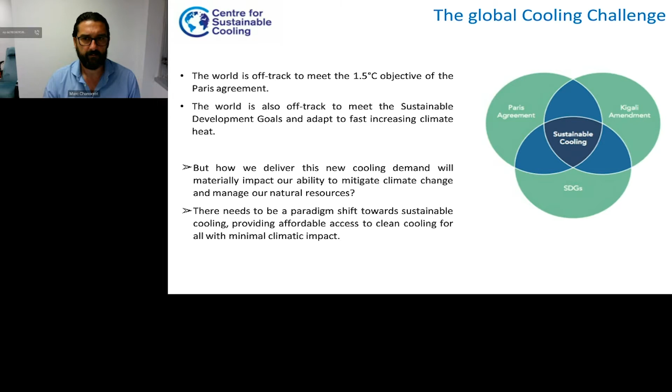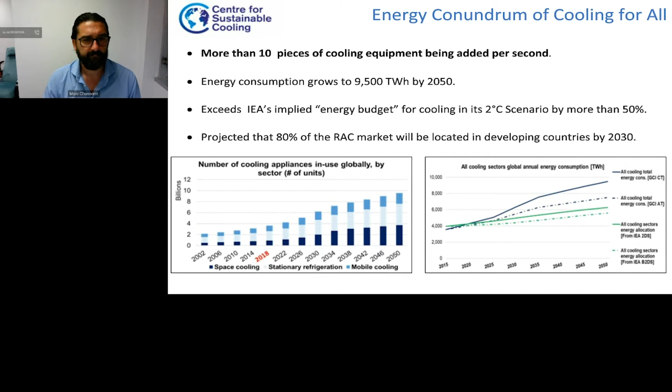The big problem is that if we want to deliver cooling for all and actually address the 1 billion people who don't have access to cooling, we could be looking at 14 billion appliances consuming 19,000 terawatt hours of energy by 2050. So that's potentially going to be consuming more than 100% of the projected renewables capacity. That's the challenge we're facing. How do we deliver cooling for all?

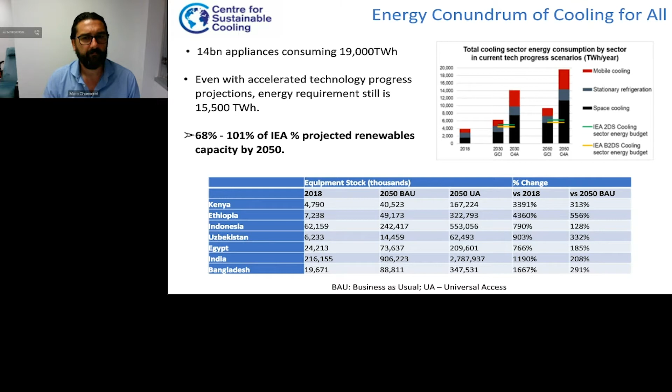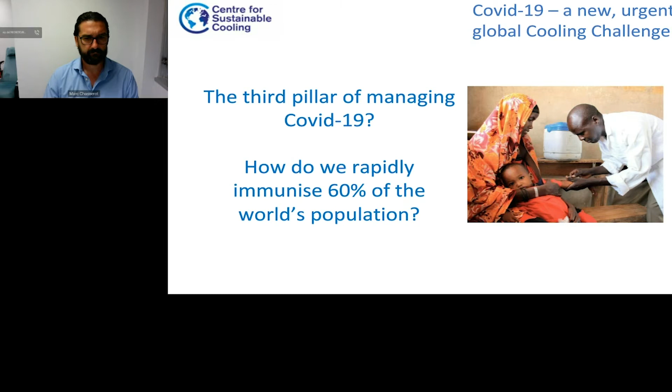There's also another new problem. While scientists are moving at unprecedented speed to develop and manufacture a vaccine, we've actually got to deliver it to potentially 5 billion people. And that's going to require a cold chain of a size and magnitude we haven't yet envisaged. Let's not forget that at the moment, we lose more than 25% of vaccines, sometimes 50%, due to lack of cold chains. And we've got 18 months to deliver this. And if we don't get it right, if we don't do it sustainably, we are going to embed dirty technologies in the system, which will remain there for some 10 years to come.

The challenge is that everybody is talking about green electricity and energy efficiency. But I think there's one really telling number which is so important. In 2017, the world added 94 gigawatts of solar generation capacity. That was the largest amount of deployment in any year. In that year, the energy demand of the new space cooling capacity, just the room air conditioners, was 100 gigawatts. So air conditioning alone is outpacing our deployment of solar. For this reason, what's really clear to me is that we can't simply look at greening electricity and energy efficiency to solve this challenge. We've got to look at step change, radical innovation.

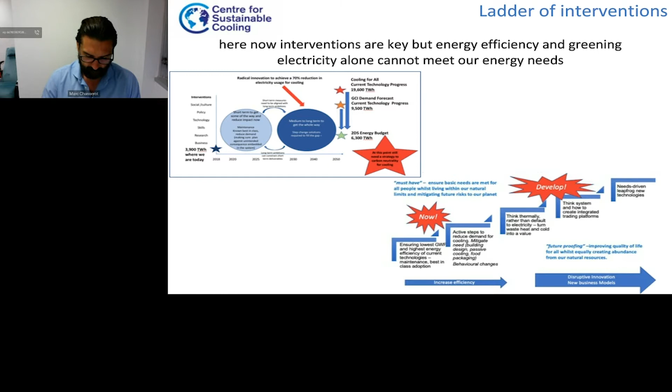The challenge is that when people think about energy, they mean electricity, and when they talk about energy storage, they mean batteries. And this blurring of concepts matters because it fails to recognize some basic energy facts of life. A large slice of our consumption comes in the form of thermal energy, and one of the fastest growing sectors of energy demand over the next 20 years is cooling. And the question is, can cooling be better served by energy carriers other than electricity and batteries?

In very simple terms, if we want to store solar energy to use at peak demand, is it better to put it in lithium ion or actually in a block of ice? And likewise, if we want to transition to electric vehicles, we have to remember that on a bus in a hot country, you can see 45% of the energy consumption of that bus is for the cooling load. Those are the challenges we face.

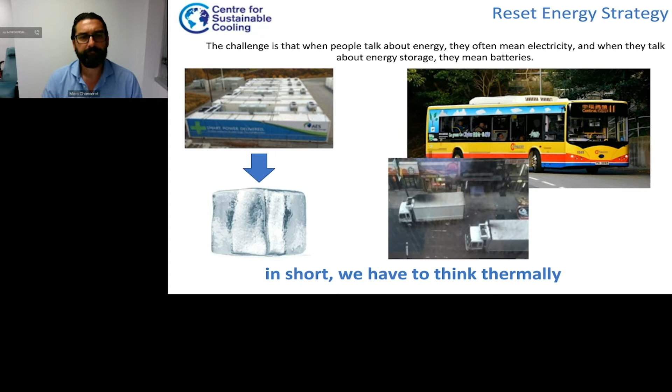So from my perspective, what we need to do is we actually have to change the question. We have to think about what is the service we require and backcast how can we provide it in the least damaging way, rather than this old-fashioned question of how much electricity do I need to generate. And in so doing, we can then start taking a systems approach to cooling.

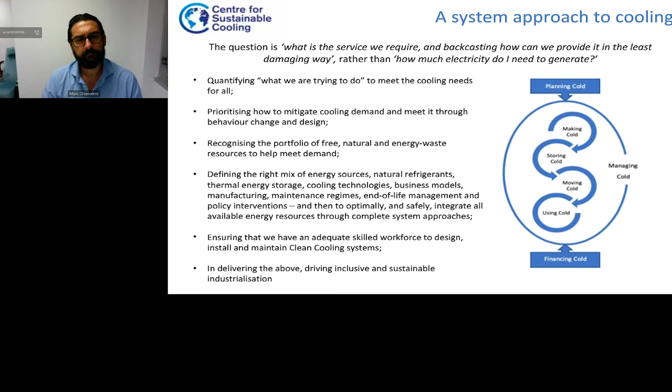We can start thinking about what's the cooling requirement. How do we make cold? How do we move cold? How do we store cold? How do we finance cold? And how do we manage cold? And once we start doing that, we really can start looking at the system and thinking about all the ways that we can meet our cooling demand in a sustainable way.

As a first step, for a government to ensure that the cooling needs of their populations are met equitably and sustainably, especially for the most vulnerable, they need to actually understand what these needs are. How much cold chain will be required to enable farmers' incomes to double by 2022? How do we end hunger and malnutrition? How much cold chain is needed to provide access to vaccines? How many degrees of cool comfort is required to avoid heat stress at home or in the workplace? In short, what needs must be met in a country to meet the SDGs with no one left behind?

And an underestimation of the scale of the cooling demand, its impact on energy consumption, I think risks contributing to a lack of ambition in policies, infrastructure and technology developments, as well as capacity building. And that will have far-reaching social, economic, environmental consequences. We've developed a first-of-a-kind needs-based assessment for cooling for all to underpin the country-scale cooling action plans.

And this is important because a focus on per capita equipment penetration rates presupposes a top-down technical solution to cooling needs and risks, and it ignores the possibility of electricity demand mitigation through the redesign of systems, the aggregation of demand, modal shifts, better building insulation, the use of waste or currently untapped resources, as well as support for existing cooling practices and behaviors.

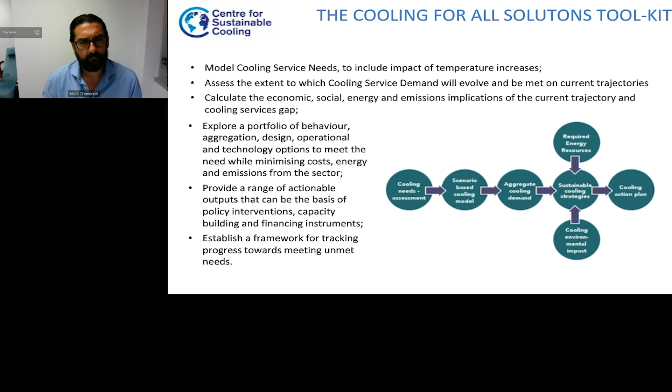It will help project owners with transparency about their actions in supporting sustainability, which will boost their reputation. And it will encourage stakeholders to consider alternative clean cooling solutions, synergies between processes, passive cooling designs. Those are just some of the examples.

And this approach, it takes a system approach to cooling. It starts using the 7 stages of planning cold, making cold, storing cold, moving cold, using, managing, and financing cold, but then assesses them against 4 key pillars: social well-being, environmental integrity, economic efficiency, and resilience. Between this, there are then the interdependencies of social ecological integrity, social economic well-being, and economic environmental efficiency.

Each pillar will have indicator categories and questions to audit the project, and we aim to launch this for peer review in the early autumn for full launch before the end of the year. And I think this audit will really transition us from seeing incremental energy efficiency to fundamental change in clean cooling, with a clear set of high standards, the highest standards which are necessary if we're going to deliver cooling for all and deliver Paris and the Kigali Amendment in parallel.

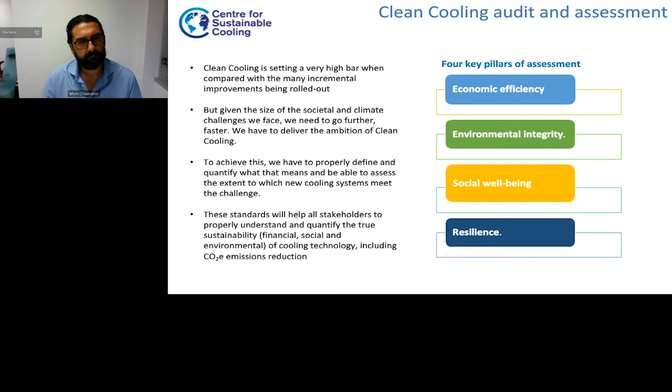So, in closing, in a warming world, access to sustainable cooling, clean cooling, is not a luxury. This is an issue of equity, and it's a service that we must deliver to all. And it's not just about air conditioners or refrigerators in every home. It's about providing more sustainable and affordable solutions to address the needs of the vulnerable, such as access to nutritious food, safe medicines, access to a COVID-19 vaccination, as well as protection from heat. And we have to do this as the world transitions to clean energy.

Clean and sustainable cooling must come to the forefront of global agendas if we're going to mitigate extreme global temperature rise and meet the UN's SDGs. And we need to work globally and collaboratively across all sectors to create and launch this effective strategy to enable cooling for all. It does require a holistic systems approach to understand the needs and to respond to them with appropriate technology, skills and training. And I believe this audit is one of the key steps to achieve this. Thank you very much.